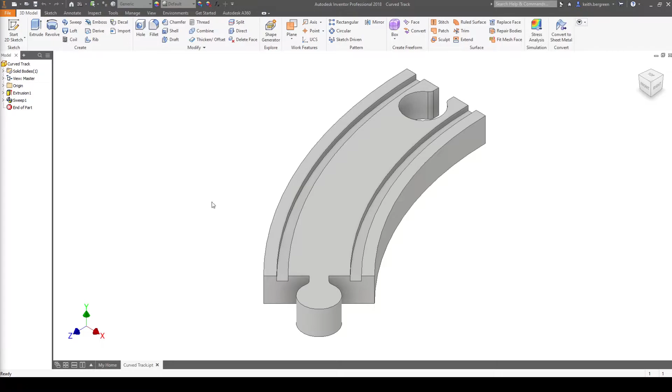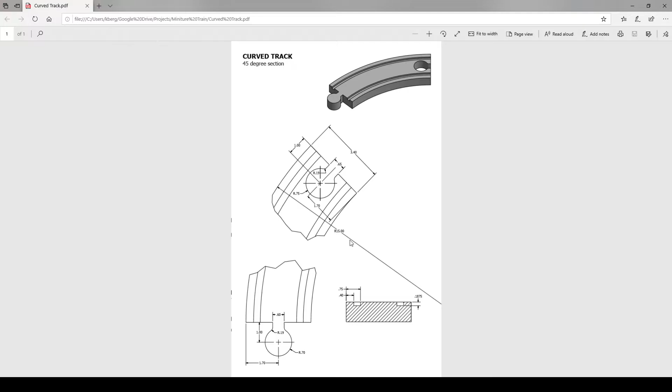So let's go ahead and create a new part, and we'll create a sketch, and then I'm going to choose the XZ plane so that way it is flat. And if you go to your drawing for the curved track, one of the first things you'll notice is this very long line right here, and I'll zoom in a little bit.

So that line is the dimension for the outer edge of the curved track piece, and what it's dimensioning to is the center of a circle, which is actually off of the drawing page. So that is a dimension of a radius of 15 inches. So imagine basically just a very large circle going all the way around, and this is just one part of that circle that you can see here.

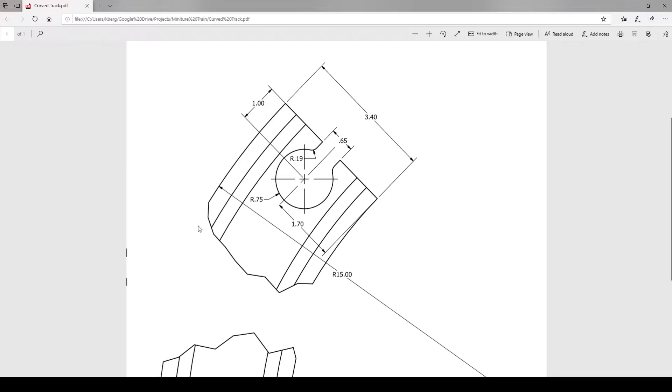So let's add that circle to our sketch here. So we'll just be adding a circle. Again, it's got to have a radius of 15 inches or a diameter of 30, and I'm using the diameter tool for the circle here. So let's add in 30.

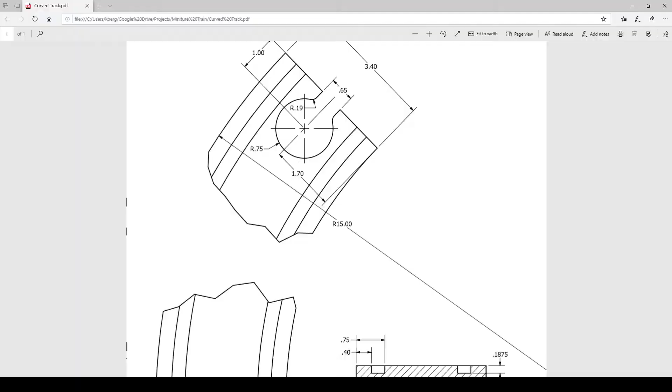All right, next, if you scroll all the way up the page, you will notice that it says that this is a 45-degree section of track. And what that means is that if you were to measure the angle from the center of the circle and you were to draw a line that would match up with this edge of the track, and then draw another line that would match up with that edge, the angle between those two lines would be 45 degrees. So let's go ahead and add these two lines and dimension them to 45 degrees.

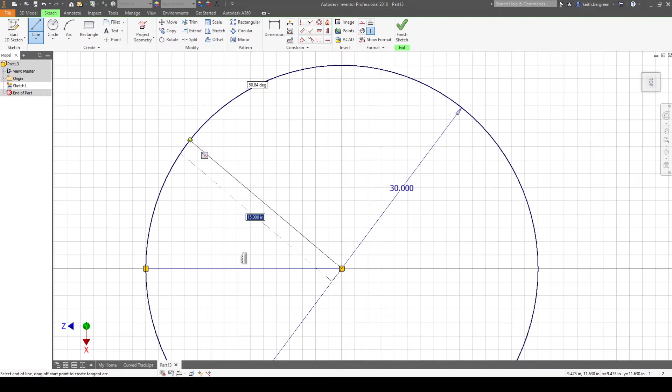So we're going to be adding a straight line on the bottom. Just make sure it connects to the circle, and then we'll just be adding another line. It doesn't really matter where you place it as long as the end is on the circle, and then we'll be adding a dimension of 45 degrees. All right.

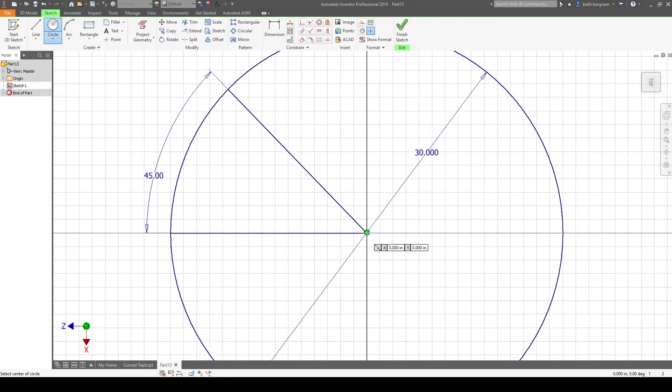And then what we'll be doing next is we'll just be closing off the shape. Let's get the bottom curve, and you'll notice that it gives us the dimension of 3.4. So let's just add in another circle, and then we'll just dimension it to 3.4 inches. So just get another circle, place it at the center, and then it doesn't really matter where you place it because we're just going to add a dimension, and we'll just dimension this to 3.4.

All right, let me redo that. All right, so we have our outline of our circle here. This dimension's going to be kind of in the way, so I'm going to move that. All right, so we have the dimension here. You'll notice we have a bunch of extra lines that we don't need, so let's use the trim tool to kind of clean this up before we move forward.

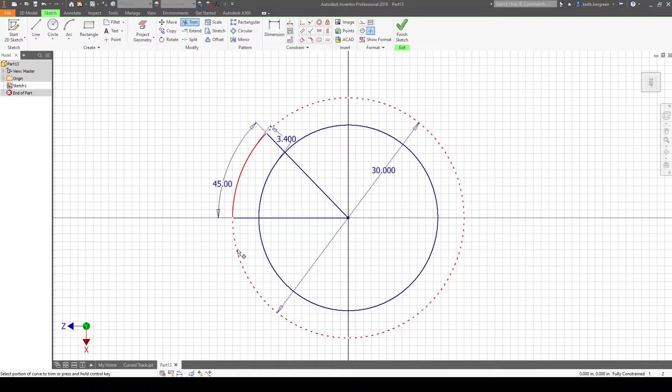So I'm just going to click on the outer circle part that we don't need, as well as the inner circle. And then you'll notice we have these lines here. I'm not going to trim those because those are dimensioned. So let's click on this line and make it a construction line, and we're going to do the same thing for the other one. And then let's use the line tool again to close off this shape.

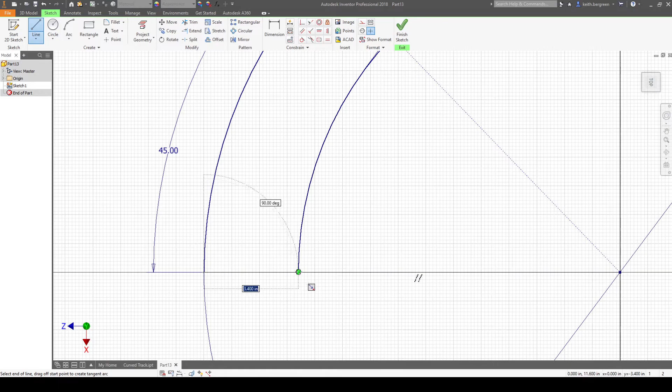Okay, so there's our outline of our curved track piece. Let's go ahead and start with the top part, which has the insert or the hole in it. All right, which will be this. So I'll zoom in just a little bit more. All right, so you'll notice basically we have a circle here, and the circle has a radius of 0.75. And it's also dimensioned 1 inch from the edge. So let's go ahead and add those two things in there.

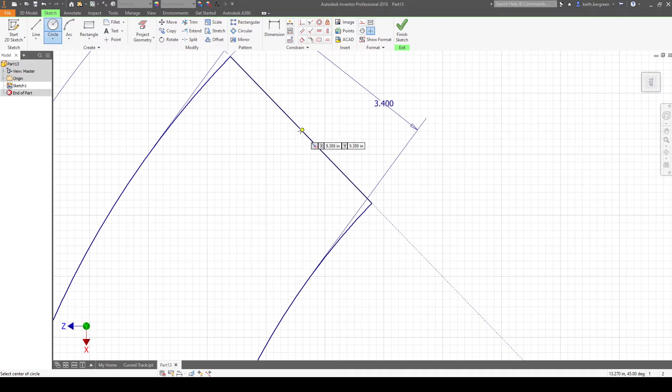So go to circle. And then as you move your mouse along this line, again, you should see a green dot when you're at the middle, which is where we want to put it. So I'm going to zoom in a little bit more. We don't want it to be on the line though. So as you move it down, you should see a little dashed line appearing. You don't have to move it down very far, just click.

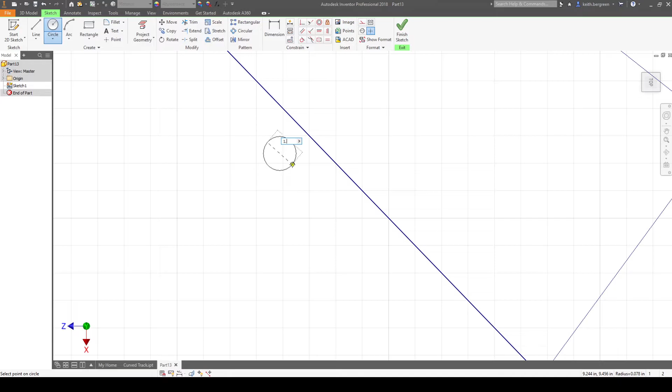And then we want this to have a radius of 0.75 or a diameter of 1.5. All right, and then let's just dimension it to the right distance from that line, which we said was 1 inch. So this line to the center point is 1 inch. Okay.

Next, let's put in this gap. In order to get this gap in here, we're going to put a line in the middle, kind of where this line is here, and then we'll just dimension lines on either side of it. So let's add in a center line first. And this will just end up being a construction line. Just make sure you have this green dot here so that you are in the center of that line. And let's click on that line and just make it a construction line.

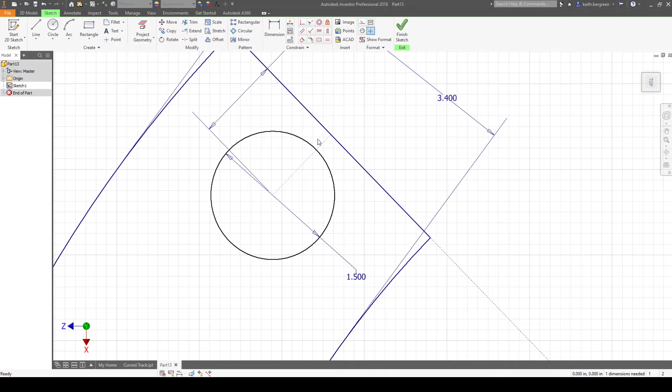All right, and then we're going to add in 2 lines. Just make sure it hits the edge of the circle, and then it should be parallel to the other line, or it should be perpendicular to this line right here. And do the same thing on the other side.

And then what we need to do is dimension the distance from that center line here. And if we look at our drawing, that has a total distance of 0.65, but since we're doing it from that center line, we want to do half on either side. So that means that is 0.325 over here, and the same over here. So this needs to be 0.325. And the other side needs to be the same thing.

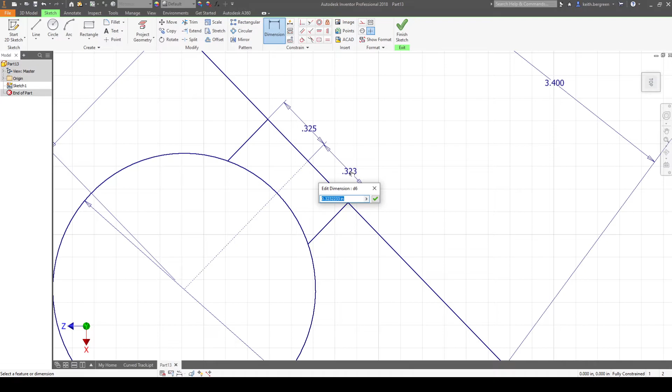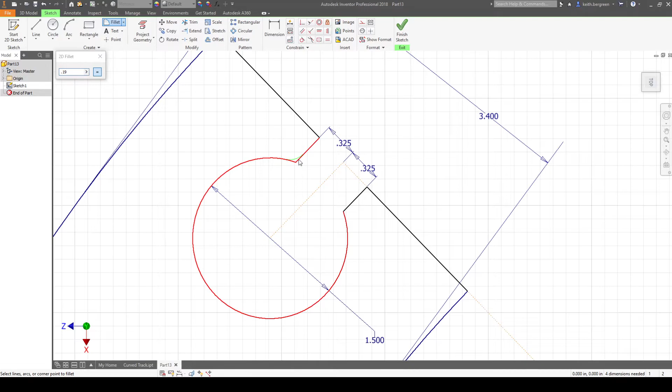All right, we have some lines that we don't need, so we're going to use the trim tool again to cut these away. All right, and the last thing that we need to do is there is a round between these edges right here. So if you go to our drawing, that round has a value of 0.19. So let's use the fillet tool to add in that round. So we'll go up here to fillet, and then we'll change the value to 0.19. And then we'll just click these lines to add in the round. All right, and that side is done.

So we're going to move on down here, and this one will be a little bit easier because this is a perfectly straight line. So let's go to our drawing. The dimensions here are actually a little bit different for some of these because this obviously needs to be a little bit smaller so that it would actually fit into the other end of another track piece. So you'll notice the circle here has a radius of 0.7, but it's still 1 inch from that edge.

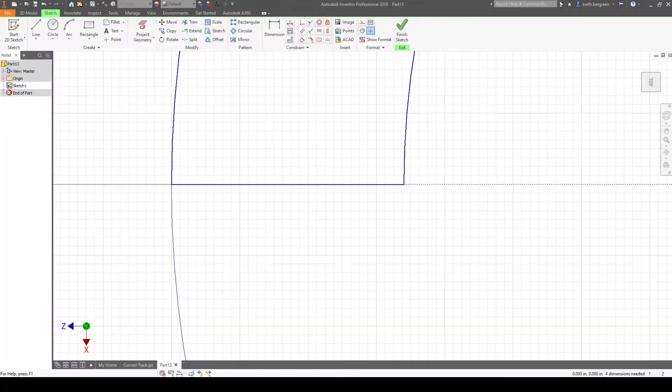So let's add that. So circle, again, make sure you're on the center line. You should see that green dot. Move it out just a little bit. Make sure you have a dashed line. And then this needs to have a radius of 0.7 or a diameter of 1.4. Okay, and then we'll just dimension it 1 inch from the edge.

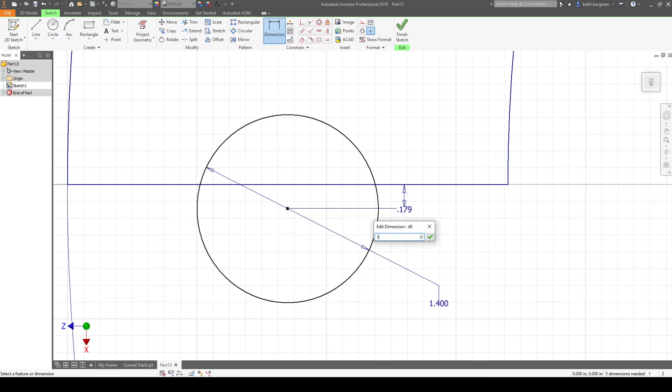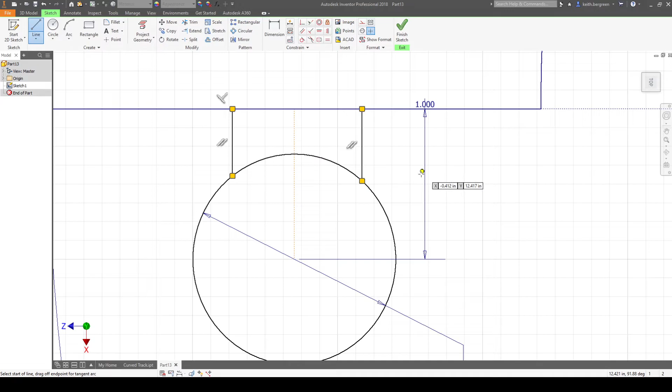And then just like we did last time, let's add in a center construction line. And then let's just add some lines on the ends, and then we'll dimension it. Okay, if we look at the drawing, the dimension for that is 0.6 all the way across. So that means we're going to do 0.3 and 0.3 for the sides here.

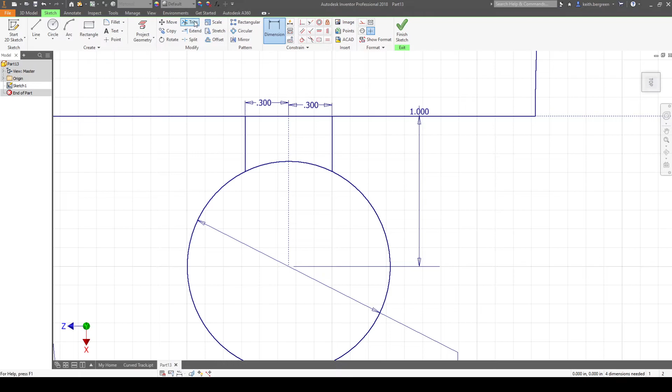And then we'll use the trim tool, just like we did last time, to get rid of these extra lines. And then we'll add in the round, and that round value is the same exact thing, which should still be in there. Okay, so that is now done.

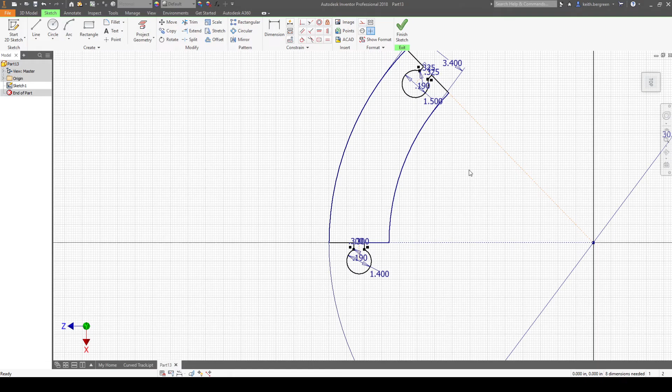So we're going to click Finish, and then we're going to extrude it. And it does have a thickness of 1 inch. I don't think that is on the drawing sheet, but again, it is extruded 1 inch. So just click OK. And there is our track piece. What we're going to do now is add in those grooves.

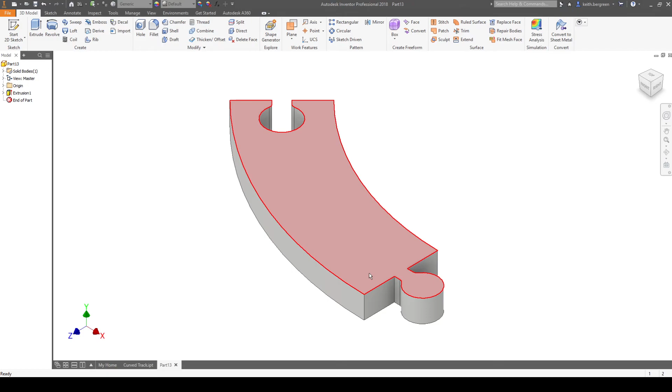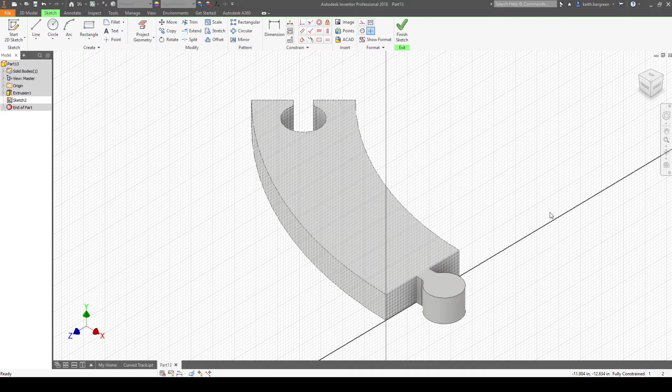So I'm going to go to the edge that is over here on the other side, I think. We're going to put that there. Actually, since this edge is aligned to our right view, let's just put it here. So I'm going to click on this edge, and we're going to make a sketch right there. And then make sure that you click on the right view so that we are looking straight at that edge.

All right, what we want to do now is use the project geometry tool to get some of these lines so that we don't have to draw them again. So we're going to get this line and the top, and then I think we're going to do the same thing on the other side, that top line and then the right line. Okay, and what we basically want to draw is we're going to be using this right here. We just want to put these 2 little squares on here. And then what we're going to do is just use that sweep tool to make those grooves.

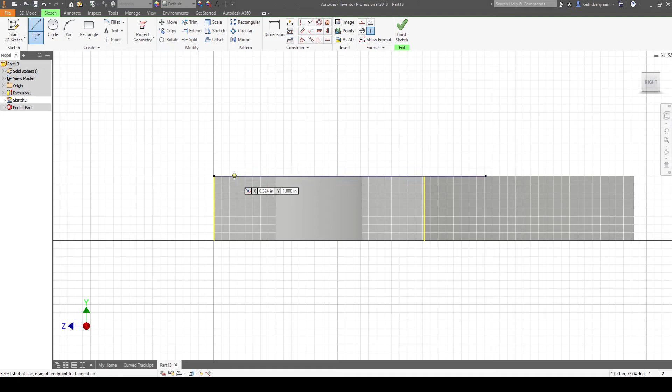So let's just add in some lines. This line needs to go 0.4 from the left side, and then 0.1875 down. We can just make it all the way down. So I'll just draw a line all the way down. And then let's just go ahead and add another line right next to it, going all the way down. And then we'll just dimension these. So this one, it's going to be 0.4. If we look at our drawing, that other one is 0.75.

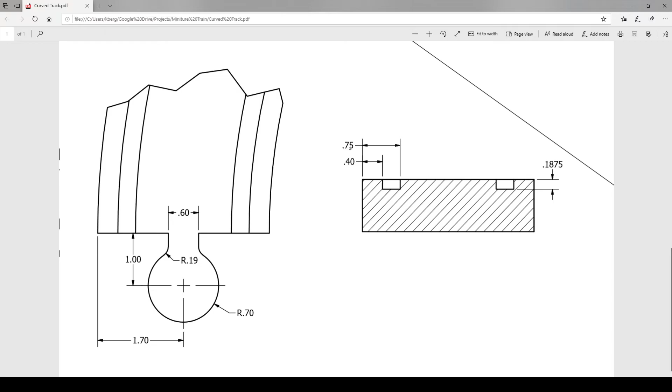All right, why don't we go ahead and do the same thing on the other side before we add in this other line. So again, just add in 2 lines. Just make sure that they're perfectly vertical. And then just dimension them. This time we're going to use the right side. And it's going to be the same exact numbers. 0.4 and 0.75.

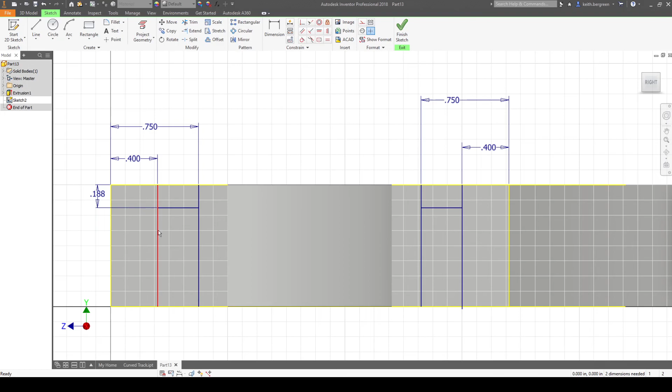All right, now let's go ahead and just add in these other lines. And again, these are just going to be dimensioned 1.875. Or actually, I'm sorry, 0.1875. That would be way too far. 0.1875. All right, and you'll notice we actually don't need the bottom parts of these lines. So let's use the trim tool just to get rid of those. So we only have the top part.

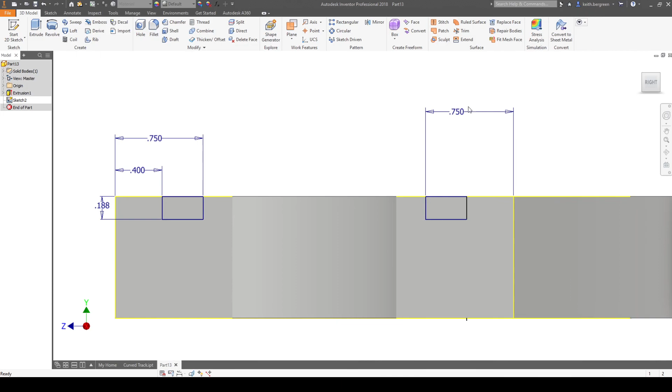And then let's just make sure that the top is closed off so that when we sweep, it selects the entire profile of that. All right, so we are all set. So we're just going to click Finish. I'm going to go back to Home, and then we're going to use the Sweep tool, which is right here. And then first you want to select your profile. Just make sure when you select the profile, you should just see the squares, not the entire thing. I just selected the entire thing.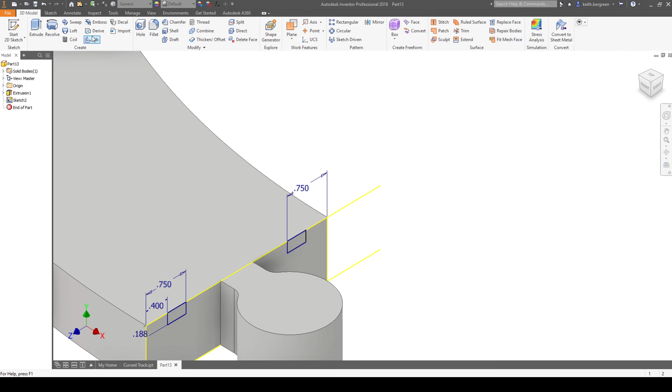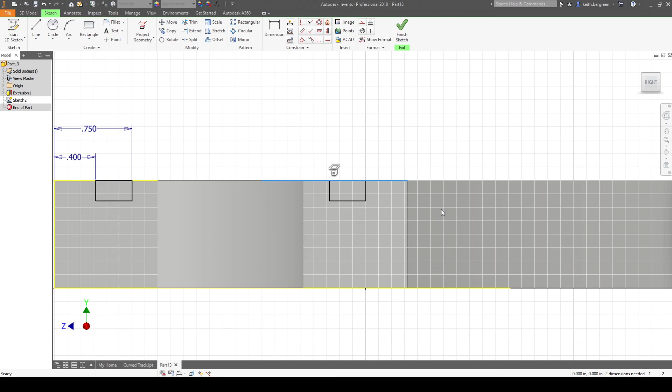Mine is having a lot of trouble. All right, I'm going to go into the sketch and we're just going to get rid of some of these other lines so it doesn't do this. Nope. Actually, let's just make these construction lines and that will solve our problem. Okay, hopefully that works. Finish and then sweep.

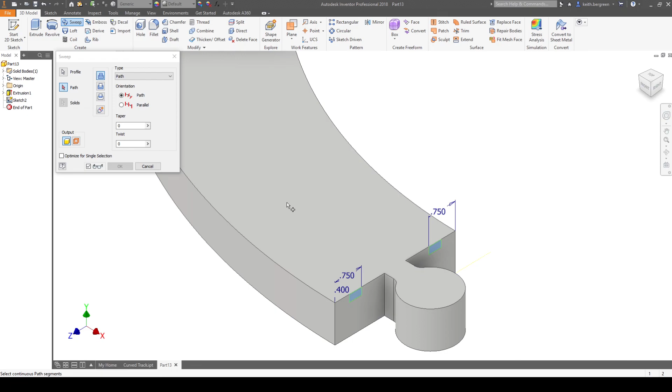Yeah. So make sure you have both of those selected, and then as far as path, you just need to click either the inside curve or the outside curve. Doesn't matter which, and then just make sure that you select cut so it actually removes the material. Click OK. And then you're going to get an error message. It's asking you if you want to continue. Just click yes, and it's going to be fine. All right, that is a curved track piece.